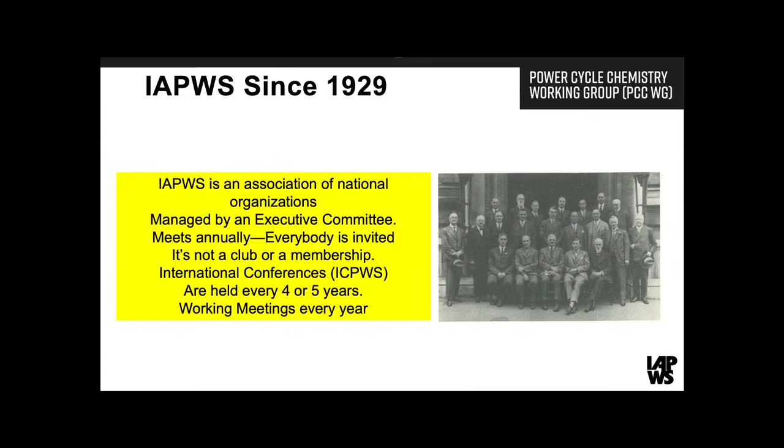Barry will be talking about those as well later on. IAPWS has been around since 1929. It's an association of national organisations. I wear a couple of hats in IAPWS - I'm also chair of the New Zealand branch, and it's managed by an executive committee that meets annually. The next meeting is coming up in Helsinki in June, and everyone's invited. We try and hold a conference every 4 or 5 years, and every year we have a working meeting that everyone's welcome to come to.

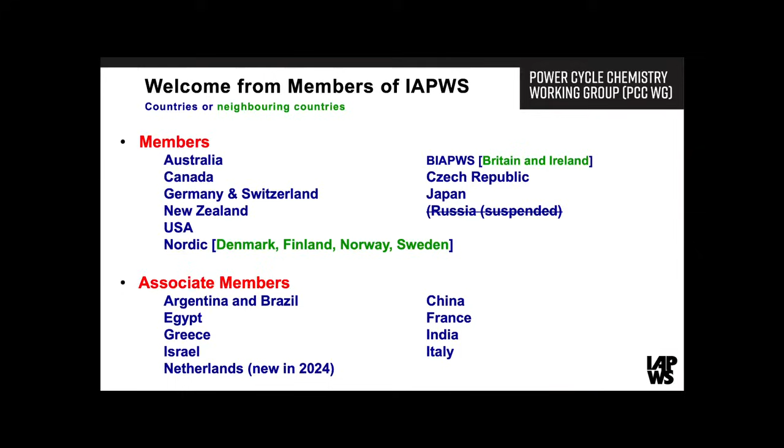Our official members at the moment are Australia, Canada, Germany and Switzerland, New Zealand, the USA, our Nordic friends - a combination of Denmark, Finland, Norway, Sweden - IAPWS Britain and Ireland, Czech Republic, Japan, and Russia is currently suspended. Then we have a second tier, associate members, which are countries forming their national committees and coming into IAPWS. There's a few of those you can see.

IAPWS is made up of multiple working groups. We have an executive committee, and we have the thermophysical properties of water and steam, TPWS - that's where steam tables come from, so anyone from a power station background will know about those.

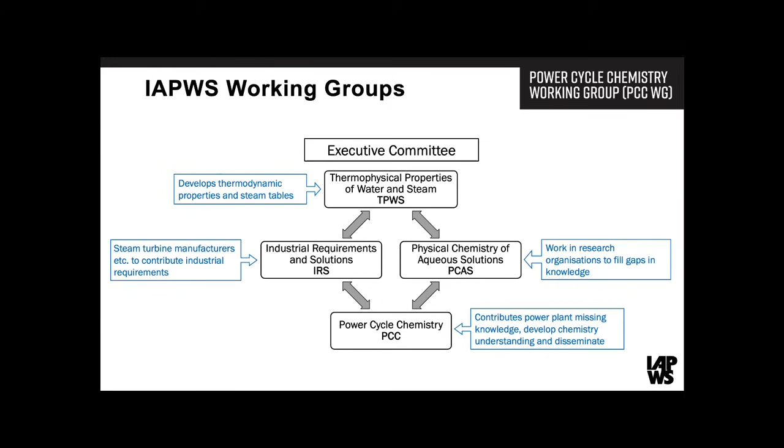We have industrial requirements and solutions, which a lot of the steam turbine manufacturers are involved in. The physical chemistry of aqueous solutions group, PCAS, involves the universities and research people. And down the bottom is little old power cycle chemistry - we're the practical cousins of IAPWS. We are the power plant, water, steam, industrial people, so we work in that area.

Barry will be talking about these, but if you go to the IAPWS website and click through onto tech guides, you'll find all of the technical guidance documents - guidelines for power plants, industrial plants, everything to do with water and steam - and these are all free to download as PDFs and use to your heart's content.

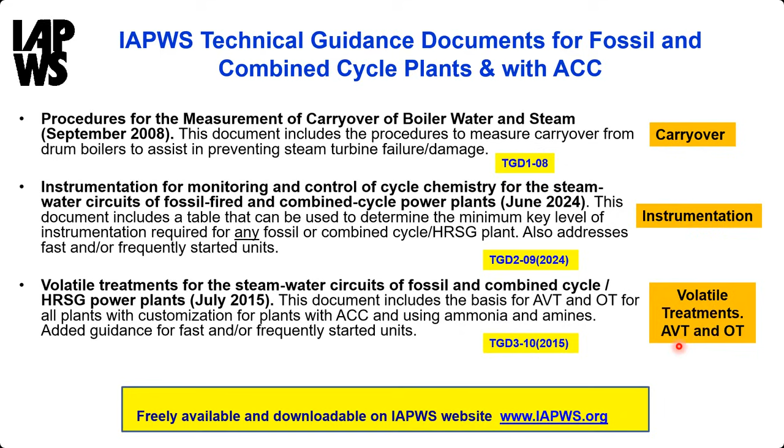And next, this one here is the other treatment document, on phosphate and sodium hydroxide. We call this PT and CT.

This is the major document on steam purity. It tells you everything about the guidance for steam, and introduces you to some of the failure mechanisms, which I'll talk about towards the end of this presentation.

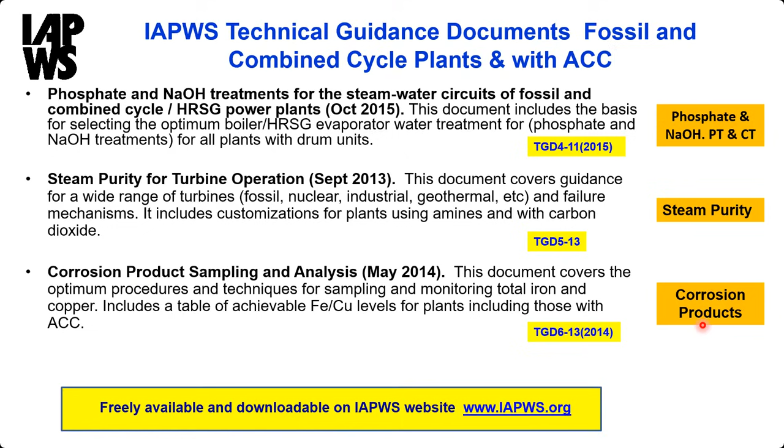Corrosion products is very important, as you'll see, probably the most important. This tells you how to measure them, sample them, and analyze them properly. This next one is the other important document for HRSGs and HP evaporators, to identify the deposits, how to sample for the deposits, and what that result then means for moving ahead with the HRSG.

There are two guidance documents on film forming substances. This is the first one, for fossil and combined cycle plants. The other one is for industrial plants.

This document at the bottom is for air in-leakage. And this is the industrial plants film forming substances document. Then the final one is on the management of generator water cooling.

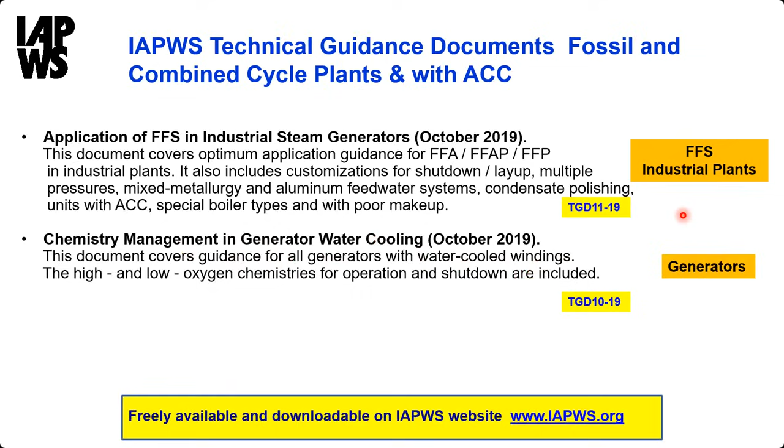Those are the major documents I wanted to introduce at the beginning, and you'll see as we go through indications like these, showing how the IAPWS documents cover the major failure and damage mechanisms that are influenced by the chemistry.

Having done that introduction, let's move ahead to why and how these technical guidance documents have been introduced. There are basically two factors that have driven their introduction and development for fossil and combined cycle plants. The first item is to delineate the major damage and failure mechanisms that are influenced by the cycle chemistry. So what are they?

The second item we need to take into account is the statistics on deficient and non-optimum cycle chemistry processes. We call these repeat cycle chemistry situations, RCCS, and you're going to hear quite a lot about those as we go through the next half hour.

So first, let's look at the major cycle chemistry damage mechanisms in these plants. First of all, of course, are tube failures. Tube failures are probably the most important, and there are two we're really interested in. One is flow accelerated corrosion, which is the leading tube failure mechanism in HRSGs and a major safety issue in fossil plants.

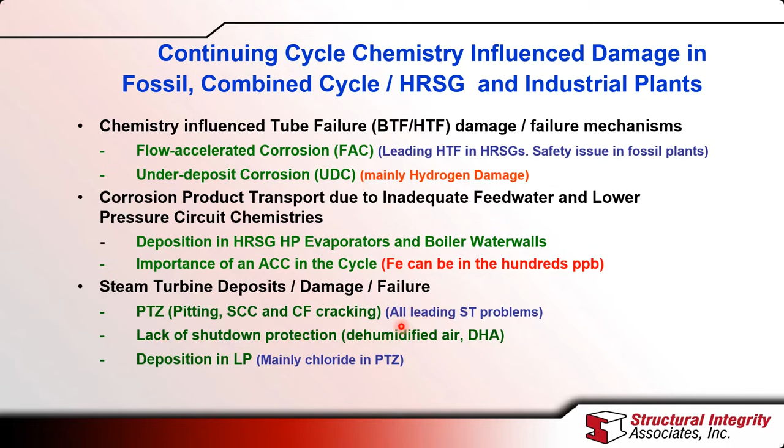So what are the main indicators of damage and failure? I've already indicated that we call these repeat cycle chemistry situations, and from the data that we have, which you'll see in a couple of slides, this confirms that the failure and damage we just talked about are not random, but are controlled by plants operating with multiples—two or more—of RCCS, and they relate to nine items. I'm not going to go through these now because we'll cover them in detail, but basically you can look upon them as deficiencies in cycle chemistry control of plants.

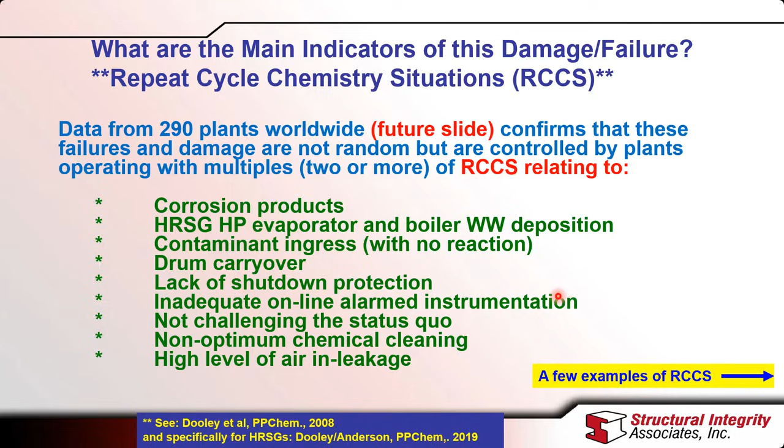To give you an indication of what they are, I've included a couple of examples here, not for all of them, just for three. For corrosion products, we most often find these two at the top: the corrosion products are not known in plants, and very often they're too high and above local guidance values. These are the two main ones for corrosion products, but there are others here that you can read.

HRSG HP evaporator deposits—these are very important because these are the items that control those failure mechanisms under deposit corrosion. HP evaporator samples are not being taken, which means there's no knowledge of deposit levels or the deposition rate. Sometimes the deposits are very high, as I'll show you a little later, and very often not linked with the chemistry or the FAC in other parts of the cycle.

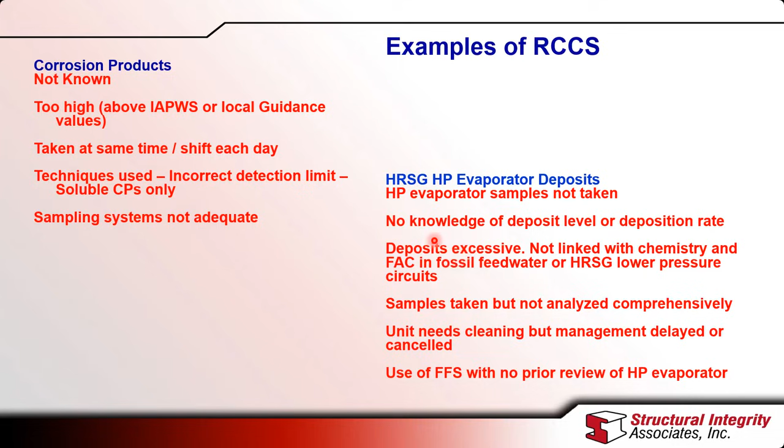The third one I want to introduce is what we call challenging the status quo, the most frequent being plants continuing to operate with the chemistry that's been there since commissioning. This means using incorrect or outdated guidelines, and continuing to use certain chemistry treatments—phosphate treatment, most often still using congruent phosphate treatment instead of phosphate treatment with only trisodium phosphate. Continuing to use reducing agents in combined cycle plants is very common, which results in FAC, and is very frequent in all-ferrous fossil plants as well. This leads to misunderstanding between two major chemistries: the oxidizing chemistry AVT(O) and the reducing chemistry AVT(R).

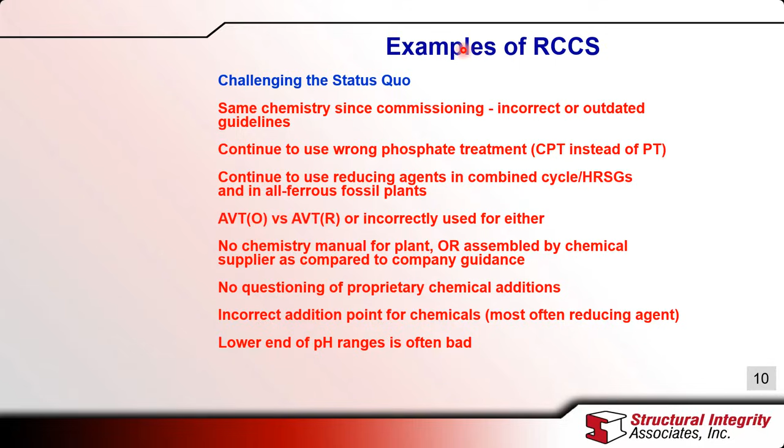Hopefully this gives you some idea of what these RCCS are. The next thing I wanted to cover was looking at the international statistics for these.

I just updated this table, which I'm going to show you next, in March for the Australian IAPWS symposium in Queensland that I attended. Here's the table, and you can see these are the categories we just introduced, the repeat cycle chemistry situation categories. This is the data for fossil plants, and this is the data for combined cycle HRSG plants. The numbers on the table represent the percentage of total plants that have these items as RCCS.

So you can see that this provides a ranking. The most important one being all the aspects involved in corrosion products, not measuring them, operating with them too high. Online instrumentation, not having the required instrumentation. Drum carryover, measuring the carryover of impurities into steam. And the fourth one, not challenging the status quo in some of the areas I talked about, usually using the wrong chemistry or using the wrong chemistry for too long.

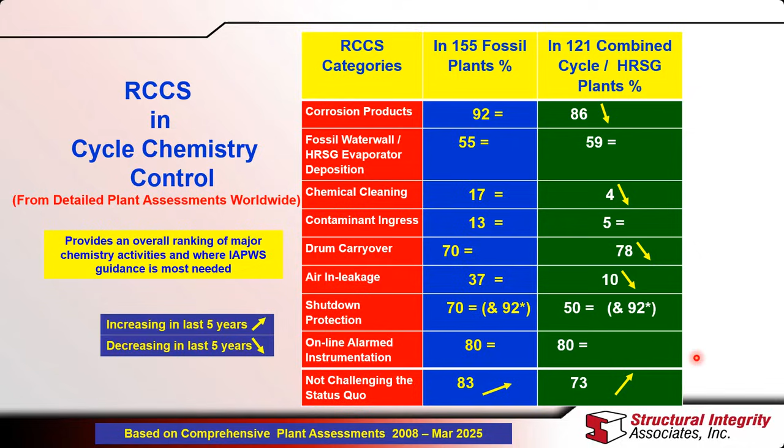Let me see if I can get the next slide here. So let's now look at the other aspect. I want to illustrate the importance of RCCS as compared to operating with the optimum chemistry. What's the difference between a plant operating with all the features already included in the guidance documents and a plant that has multiple RCCS?

We need to look at some examples of cycle chemistry influence, damage, and failure, and how the IAPWS TGD, which I introduced, address all aspects and should be incorporated into the design by the manufacturers originally. We're trying to work on that aspect. We have been for some time, and operation with the plants, and that's up to people like yourself using these guidance documents. So to illustrate this, what I've done is...

I've just selected four damage and failure mechanisms here, and I'm going to go through each one, tell you which parts of RCCS contribute to these and which of the IAPWS documents directly address these problems.

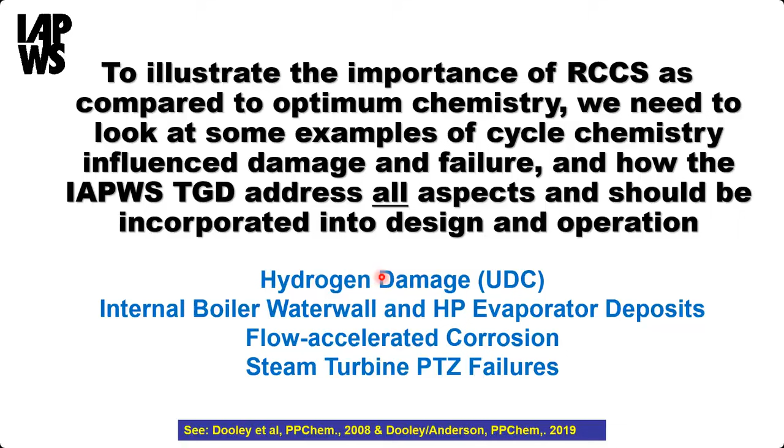So the first one, we'll look at under deposit corrosion and hydrogen damage. Here are a couple of examples: under deposit corrosion, hydrogen damage in HRSG, HP evaporators. You can see the inside surface looks a little dirty, very heavy deposits. If you cross-section it, you can see those heavy deposits and the corrosion that takes place right here. And down here is where we've conducted a metallurgical examination. You can see the very heavy corrosion products.

When we look at these in detail, you can see it most often looks like this in a laminated structure. This laminated structure indicates that the rate is very fast. It's a linear corrosion rate, and that's why these are so important. Eventually, we get a brittle failure, as you can see right here.

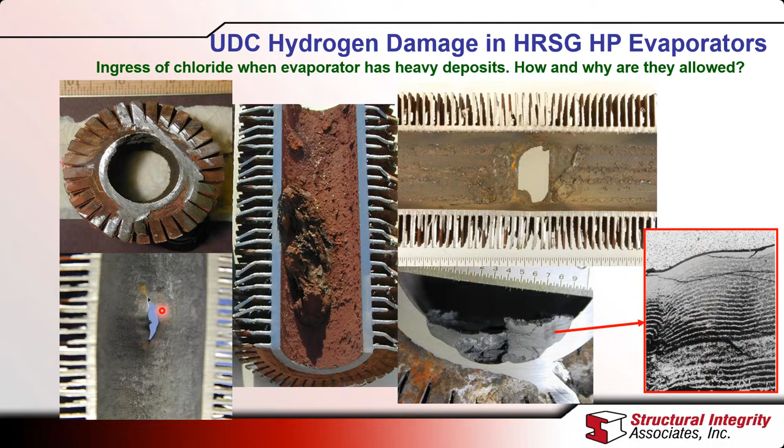And if we look at the same mechanism in fossil plants, you can see again the examples of the brittle failure that takes place, initiated by heavy deposits on the internal surface. Here's the heavy deposit on those internal surfaces.

When we look in detail with analytical microscopy, we find that along this interface here, we usually have a chloride, and this chloride is there because it's concentrated at the bottom of a heavy deposit. It won't concentrate at the bottom if the deposit is only thin. So this is a key part of the hydrogen damage under deposit mechanism.

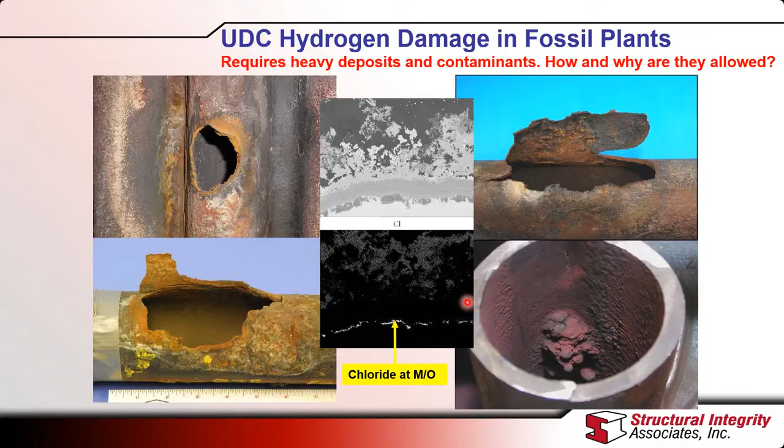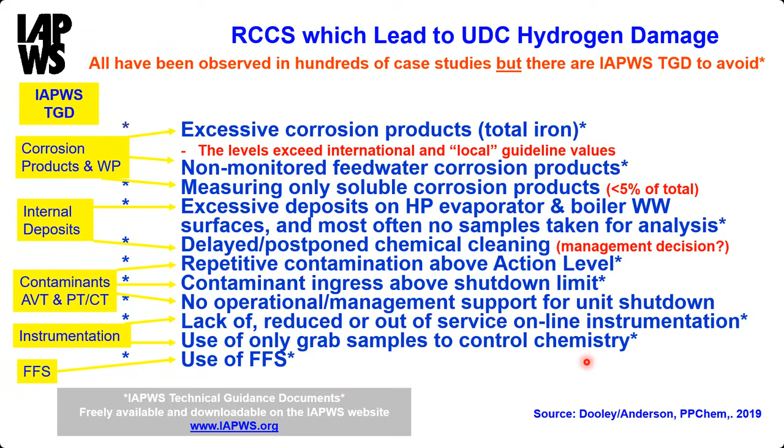So let's have a quick look at some of the details of the corrosion product ones, because they're the important ones. Here we have, technically, something old and something new. The old is the original IAPWS document on corrosion products given down here, and this includes all the information you need on sampling and locations of where to take those corrosion product samples, how to do the analysis, and most importantly, that you need full digestion to make sure that all the particles are solubilized so we can do the analysis properly.

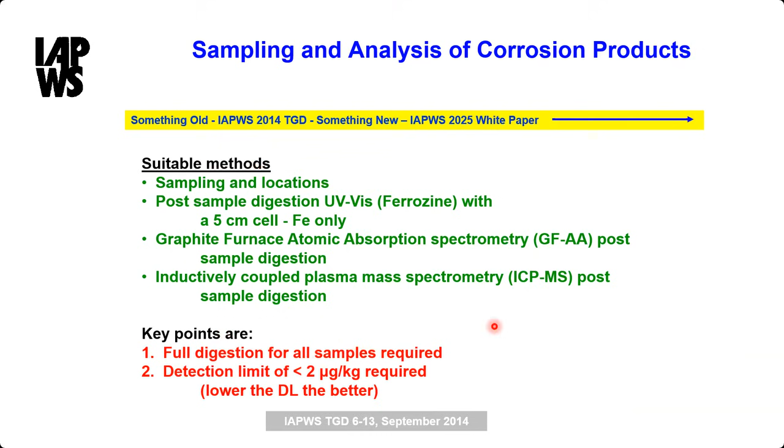And the next slide shows the famous achievable levels - this is the achievable iron and copper levels for different types of plants. This, I emphasize, is for steady state base loaded plants. So for instance, if you have a fossil or combined cycle plant operating on AVT, you would like the total iron levels to be less than 2 ppb. If you operated on an oxidizing treatment such as OT, then you would want the iron levels to be a little lower than that. Here's the same value for drums on HRSGs.

Here's the values for units with air-cooled condenser at the air-cooled condenser outlet in the condensate system, less than 10. And if you use a post-condensate filter, we like a 5 micron filter, then you would be hoping to achieve less than 5 micrograms, 5 ppb.

So this gives you an indication that if you have higher values than these, then when we go to plants, we would rate that as an RCCS. You can rate it yourself as an RCCS and address it.

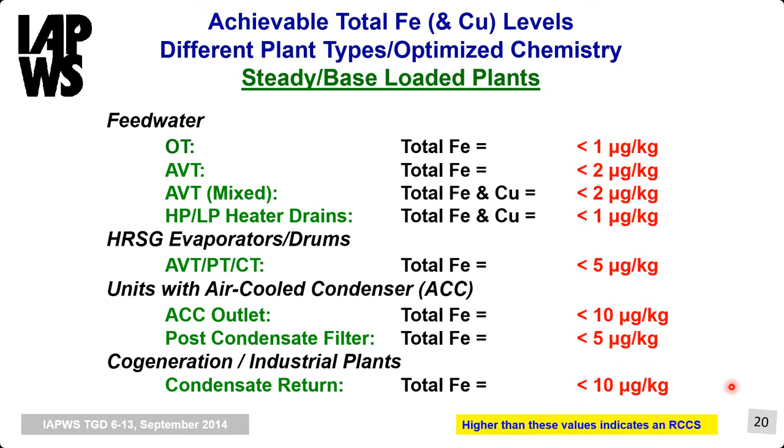So now what I wanted to go into is an almost brand new IAPWS white paper, which we just published. This is for fast start or frequently started plants, in comparison to the steady plants that we've just talked about. Here, the important corrosion product indicator is how quickly the iron decay takes place from the high shutdown level during startup. This can be monitored using proxy techniques such as turbidity.

You can see here's an example of it from some of the work we did in developing this. You can see here's the decay profile, as we call it, and these vertical lines indicate what's happening on the unit - gas turbine fires, makeup additions, synchronization - and this is the calibration curve.

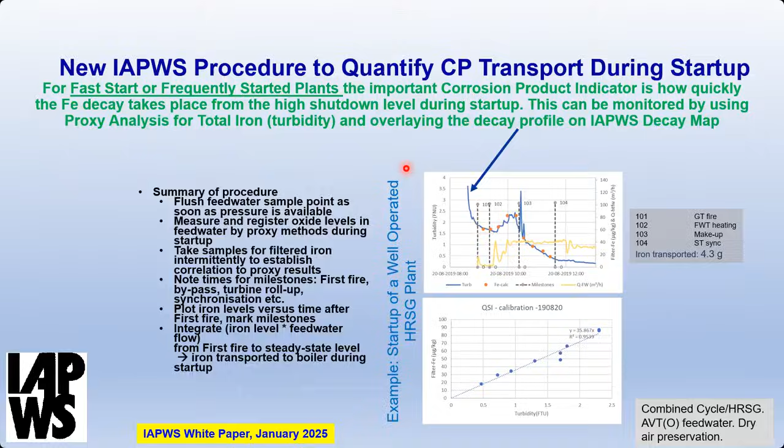So once we had this, we then needed to have a tool to be able to make an assessment of whether this profile is good or bad. And this is one of the most exciting things that I've been involved in for many years. This is a really excellent tool, I think.

Here is what we call the IAPWS corrosion product decay map, and you can see that it has basically three colors. If that decay profile is in the green, it essentially translates to a particular unit having the optimum operational chemistry and shutdown chemistry. If it's in the red, completely opposite - poor operational and poor shutdown chemistry. At the bottom here, we've just put the levels from that achievable table that I just showed you.

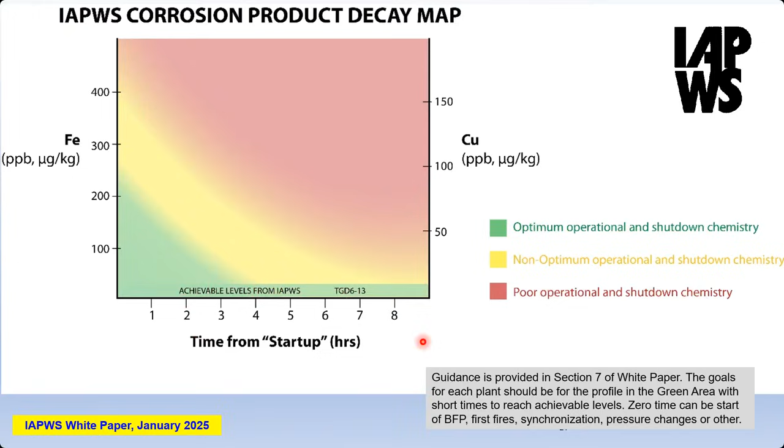So here's the first example. This is that profile that I just showed you that we developed, and it's been superimposed on the decay map. You can see that it's basically in the green area, suggesting that it's optimum operational and shutdown chemistry.

It comes almost down to the achievable level in a couple of hours, which is good. This is for a well-operated combined cycle plant operating on AVTO, but using dry air preservation of the boiler - so good shutdown protection as well.

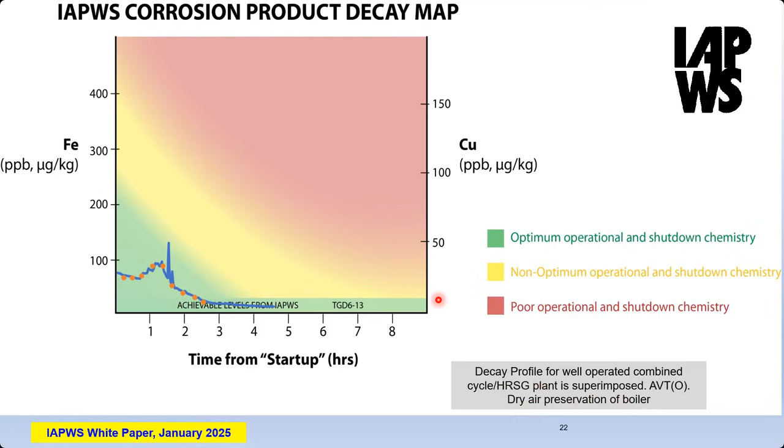So contrast that with these two examples. These are examples from plants that need to improve the operation and/or the shutdown chemistry. In this case, this is again an all-ferrous unit operating on AVTO, daily load cycling, and starting up in 60 megawatt increments.

And now you can see that this decay profile is into the red with very high levels. So the total amount of corrosion products, iron, that's transported will be very high. And you can see that those high levels essentially last for 4 or 5 hours.

This is another example, another all-ferrous system operating on AVTO, as it has summer shutdowns with no protection. In this case, the profile doesn't actually go into the red, but you can see it remains high for quite a long period of time and does not come back down to the achievable levels until 6 or 7 hours. So a large amount of iron being transported into the unit.

So from the point of view of RCCS, if the decay profile is in the red or the yellow, then we indicate that that's an RCCS, and you can do the same. You can do these proxy tests very easily and superimpose them on the IAPWS map and see if you have RCCS.

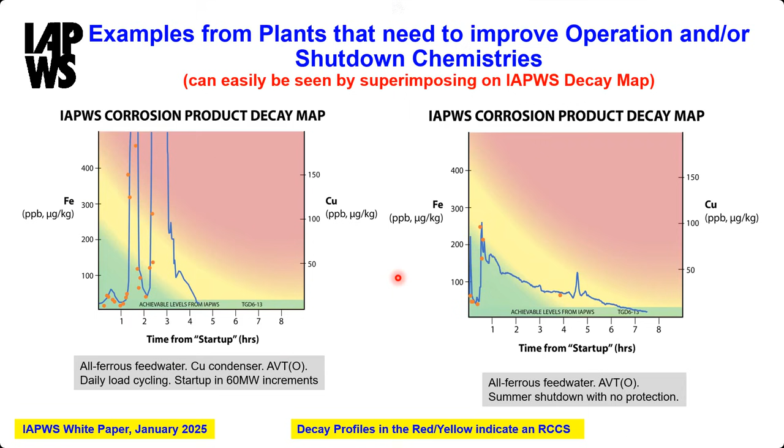So the new white paper also includes something I think that's very useful: possible uses for the decay map. The first one, obviously, should be clear. It provides some fine tuning of the cycle chemistry and shutdown procedures of a unit, to minimize the iron with the decay profile moving to the green.

The way that I look at these is not the absolute values of the iron levels, but how quickly you can move that decay profile into the green area in the lower left part of the diagram.

The white paper in section 10 provides you an indication of what optimum chemistries are, and of course non-optimum chemistries, and it includes that for all the different types of units: supercritical, drum units, combined cycle. This is very, very powerful, for all the units that exist in the world. You can go to this section 10 and see what's good and bad.

You can also use it for units with an ACC. If you've been operating with a low pH and you've got very high levels of iron, then you could increase the level of pH and watch the iron level come down. Again, you want it to move towards the green, towards the lower left.

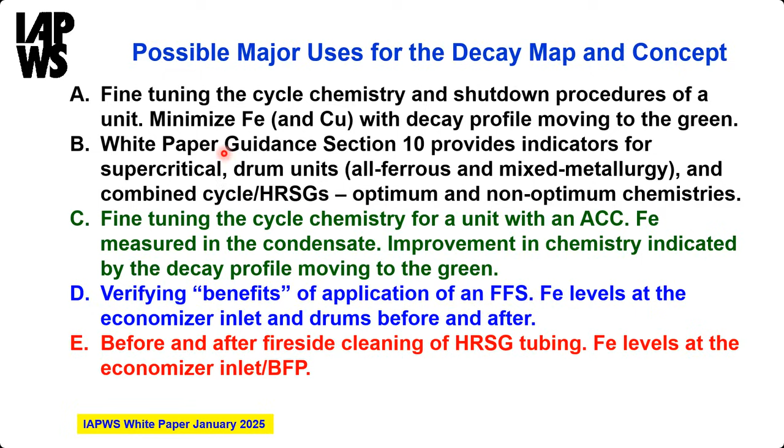So now I want to move on to the second area that we selected, and this is for deposits on boiler water walls and HRSG HP evaporators. These are important because they are precursors to under deposit corrosion mechanisms.

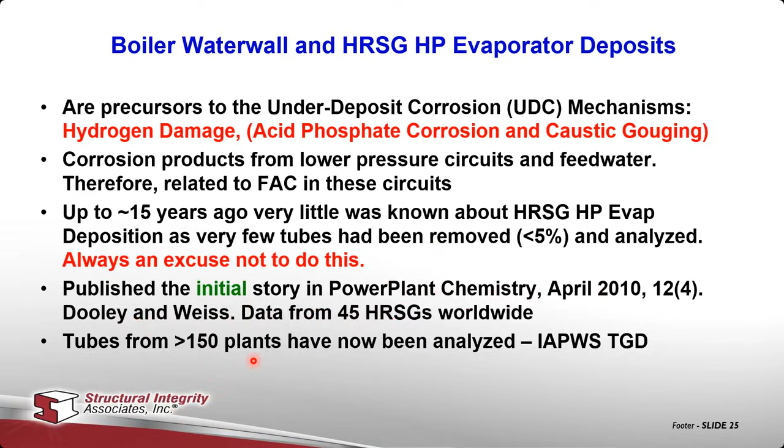Up to about 15 years ago, there was very little known about HRSG HP evaporator deposition, as very few tubes had been removed. We published the first study. My colleague and I at Structural looked at 45 samples and developed what I'll show you in a minute, the deposit map. Now we've continued, and others are doing the same, and we have more than 150 plants in the database. The actual format of it has not changed at all.

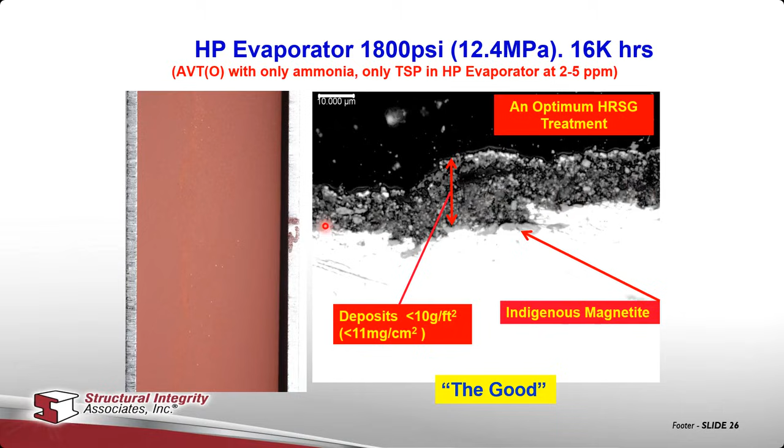Let's have a look at some examples of optimum HRSG chemistry. You take a tube out, and it looks nice and red and smooth like this. When we take a cross section, the white area is the tube, and these are the deposits. You can see pretty low levels here, and the deposits themselves are particulate, and most importantly, there's no concentration at the base of the deposit. So this is very good.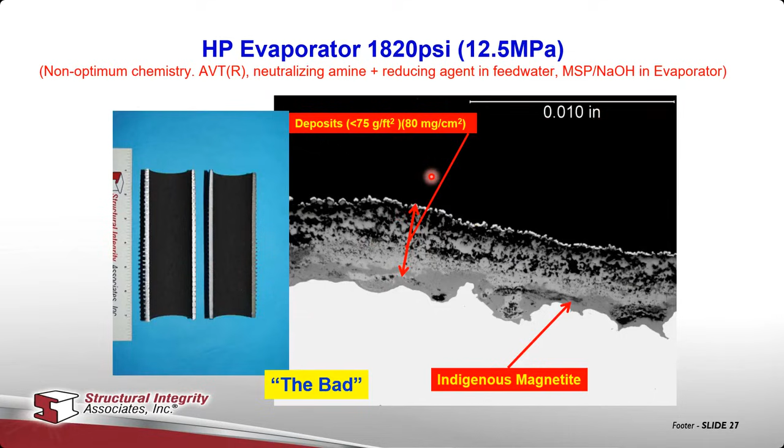Contrast this with an HP evaporator with non-optimum chemistry using AVT-R. When we take the sample out, they're usually black on the inside, and the deposits are very thick, much thicker than what we've just seen. If we do a little more analysis, we can see that in these heavily deposited areas - this is the deposit, this is the tube - you can see these dark areas along the base of the deposit right here. We call these reaction products.

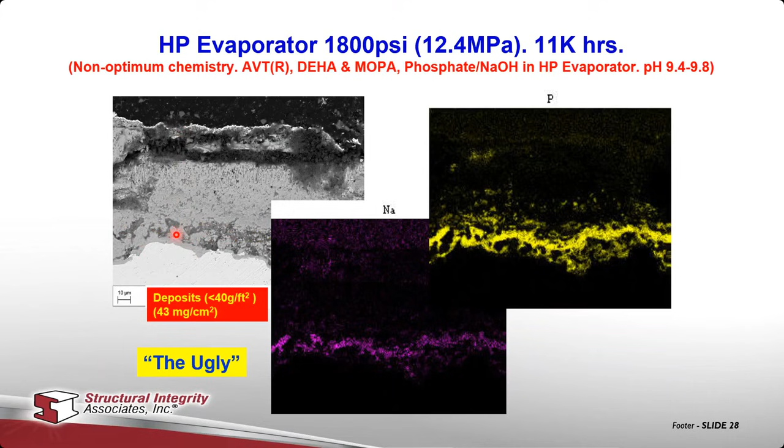You can see them highlighted with sodium phosphate right here. We don't want to see these, because this means you can have concentration of chloride as well and end up with under deposit corrosion. So this is an important aspect of preventing under deposit corrosion: to identify not only the deposits and their levels, which a lot of organizations do, but also identify these corrosion reaction products, which are these dark areas right here.

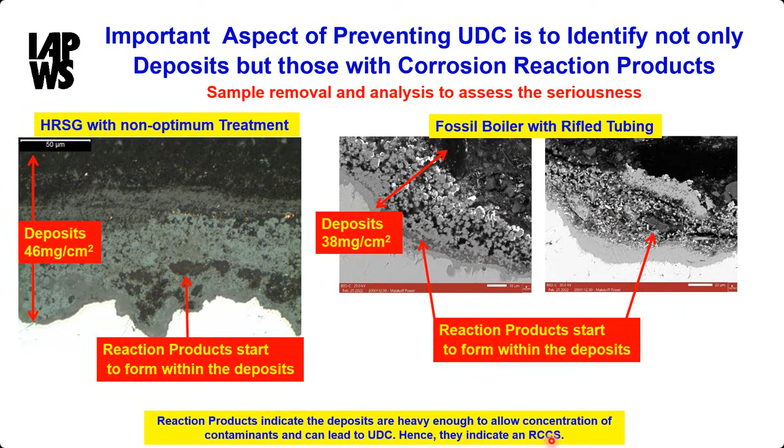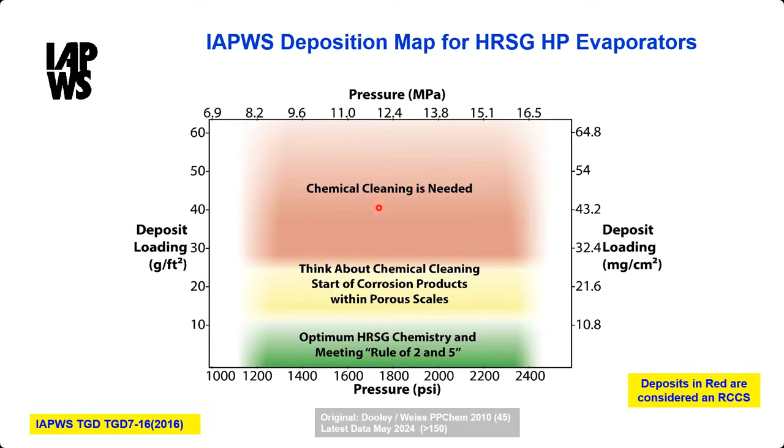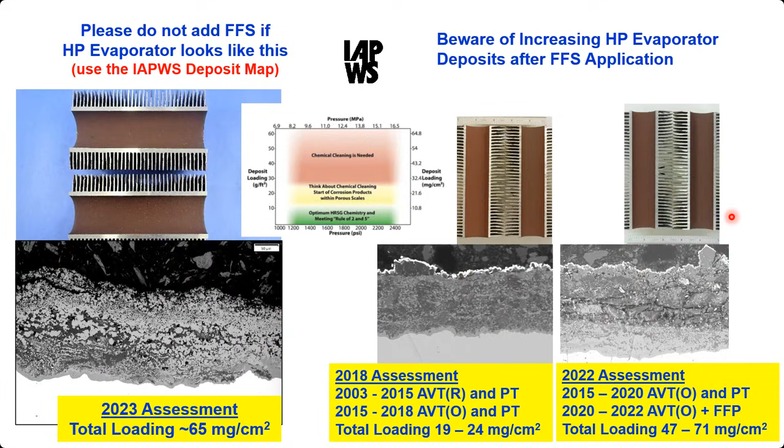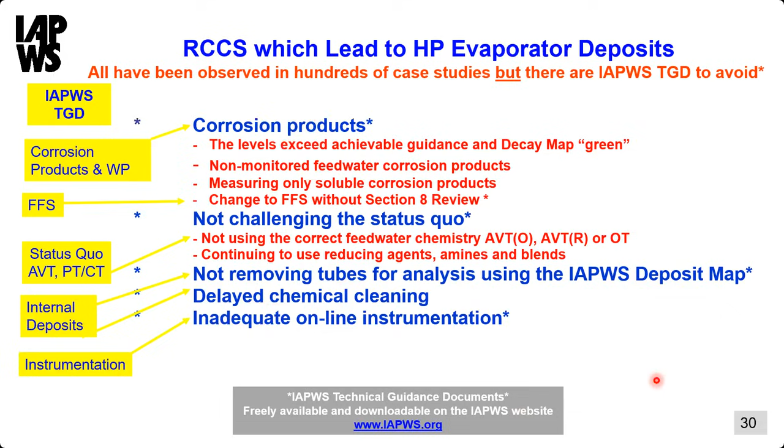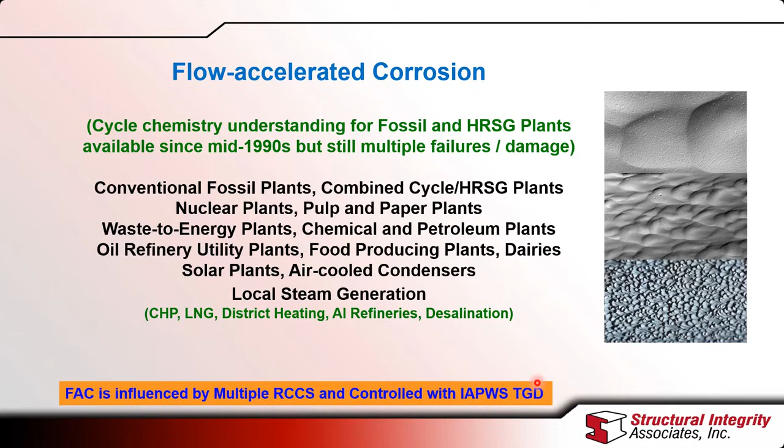So let's just have a look here. We have very extensive records in terms of where FAC exists. And if any of you want to go further, at the bottom of all these slides there are references. Scott has a special page where he can reference these. They're available freely to you on a website somewhere, and he'll provide that to you.

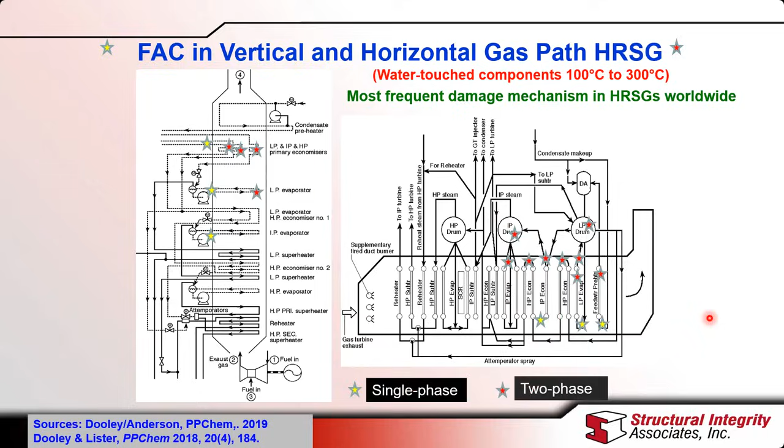But we have this excellent understanding of where FAC takes place in a single-phase version and a two-phase version for HRSGs, and similarly for fossil plants. So again, the single-phase FAC items are right here, and the two-phase ones are generally in the drain lines and the cascading drain lines right here. If you want to know any details about it, please go to this reference where it's very extensively covered.

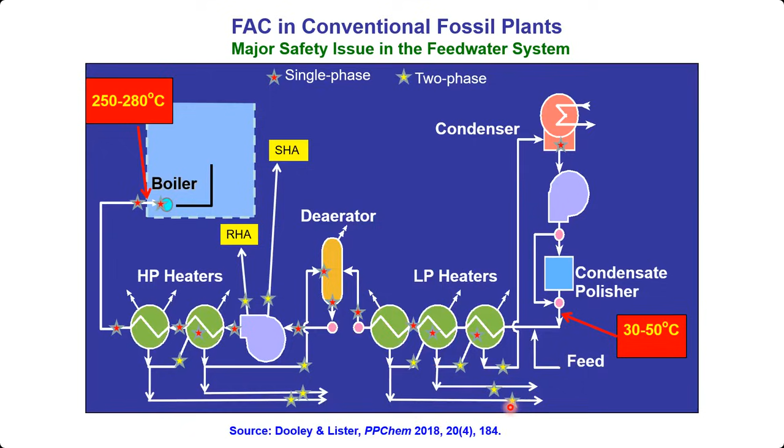So I wanted to indicate that the situation with FAC is still occurring, and not a very good situation, possibly at the same rate as it has for the last 10 or 15 years. All the examples of FAC are numerous and published. There are basically no new locations or situations over the last 15 years.

But the real item from a chemistry point of view is that single and two-phase FAC are still occurring and not being identified uniquely. This is one of the most important things in FAC control, because these two types of FAC are controlled differently from a chemistry point of view. Again, the published documents indicate this in great detail. So let me show you a couple of examples of what to look for.

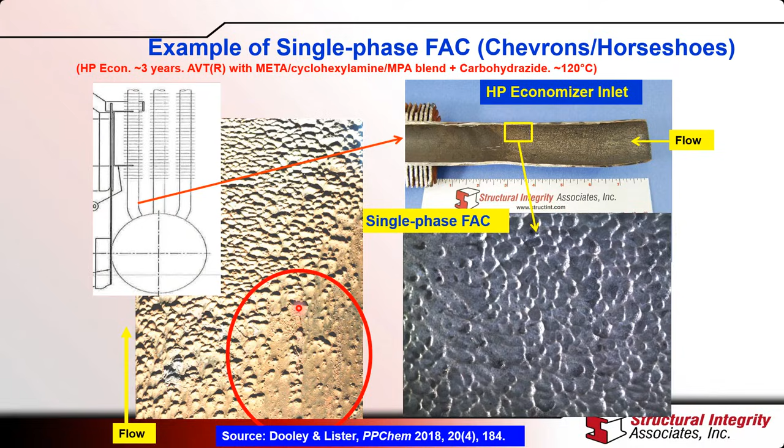This is an example of single-phase FAC, and many of you will have heard of the orange peel appearance, which looks like this. But the real thing that indicates whether it's single-phase FAC is where the FAC is not quite as severe. You see this line of chevrons or horseshoes. We say the horse is walking in the direction of flow, and this is the key indicator for single-phase FAC.

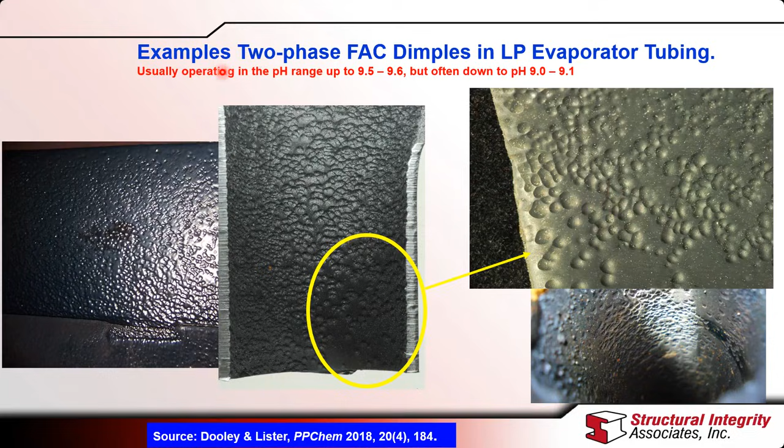But this is very often misidentified as single phase FAC, and the plant is trying to solve the problem by adding oxygen. I have to tell them that they can add as much oxygen as they want, they will not turn off this FAC. So it's very important that you identify whether it's single phase or two phase FAC.

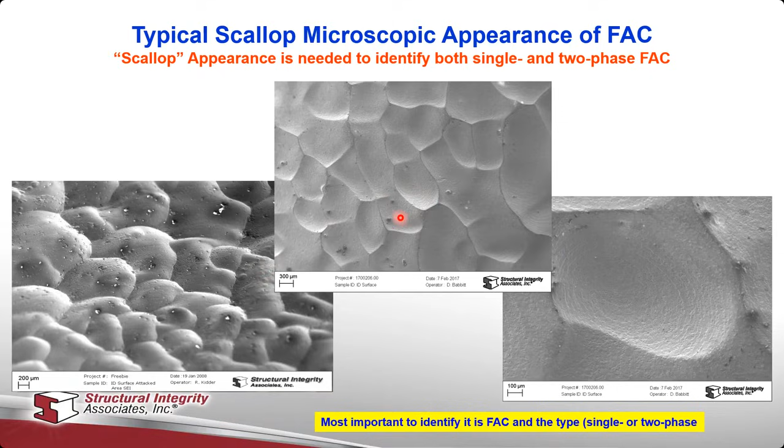And then if you take the metallography a little bit further and look at it in a scanning microscope, we generally see this sort of appearance. These are called the scallops of FAC at a microscopic level. So it's most important to identify that the failure mechanism you're dealing with is FAC, and the type is either single phase or two phase. You see this appearance in both single and two phase FAC, but you use the morphology I've just shown you to identify which one.

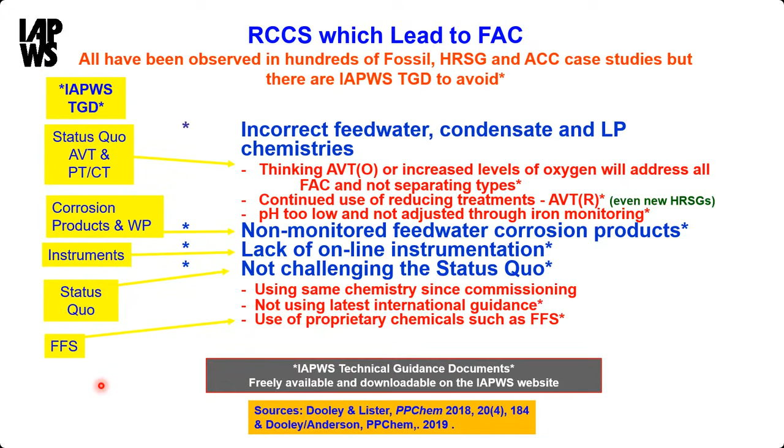Not monitoring the feed water corrosion products to see if you have FAC. I've already covered that, it's covered by the corrosion product TGD and the new white paper that you can do that. And instrumentation, whether you have the right instrumentation, status quo, using the same chemistry since commissioning, basically the same things I mentioned already. You'll notice that for each one of these RCCS items that lead to FAC, there's an IAPWS technical guidance document to address it. So let me move on here.

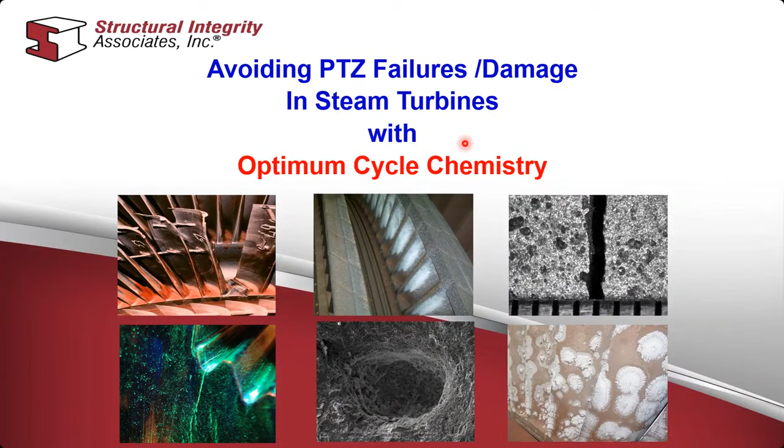The final one that I want to just cover in the final 5 minutes is avoiding phase transition zone failures and damage. That's in the phase transition zone of the steam turbine. Here's a couple of examples.

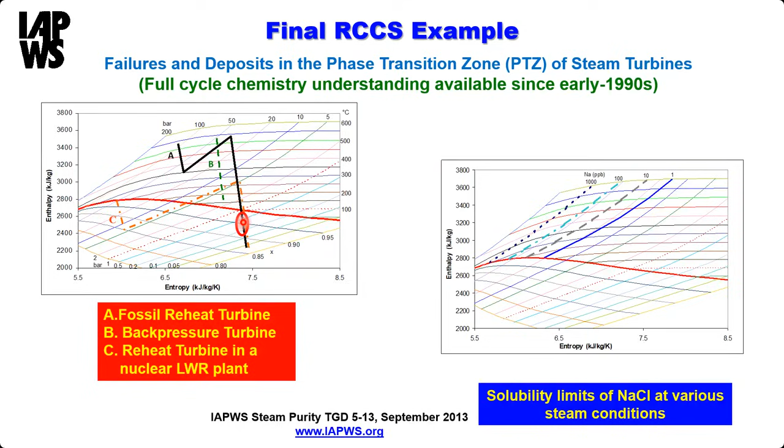Just so you know where the phase transition zone is, this is what we call the Mollier diagram, and this is the steam expansion through the turbine. This last part is through the LP, and the red is the saturation line. This is the phase transition zone here, where the phase transition takes place, and so this is the important area in the low pressure turbine. These are just some examples.

The important thing to note is that the chemistry activity in a steam turbine, all phase transition zone failures initiate at pits. You can see many examples here - this is a pit, initiating at a pit. The next slide shows the same, a little bit more detail, but at the metallographic level you can see the pit, stress corrosion cracking, initiating at a pit, at a pit, at a pit, and at a pit here. So this is one of the common features that we see.

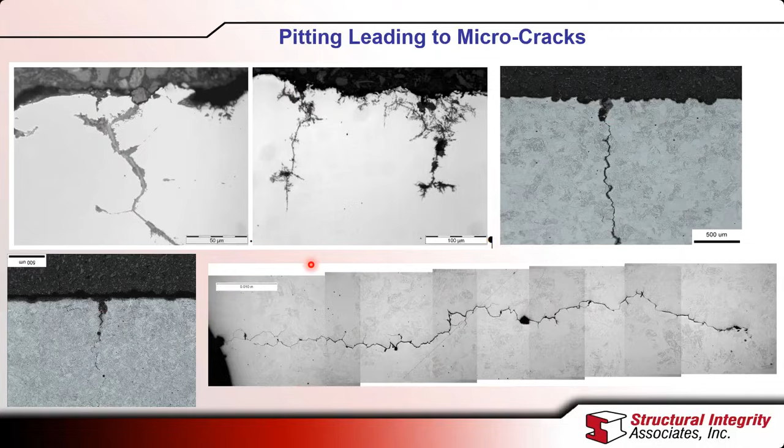To understand this, you have this number of things - a very complicated mechanism - but we've identified it with some help from IAPWS and some other work that was done, some of it supported by EPRI when I was at EPRI, by Palmer and Simonson.

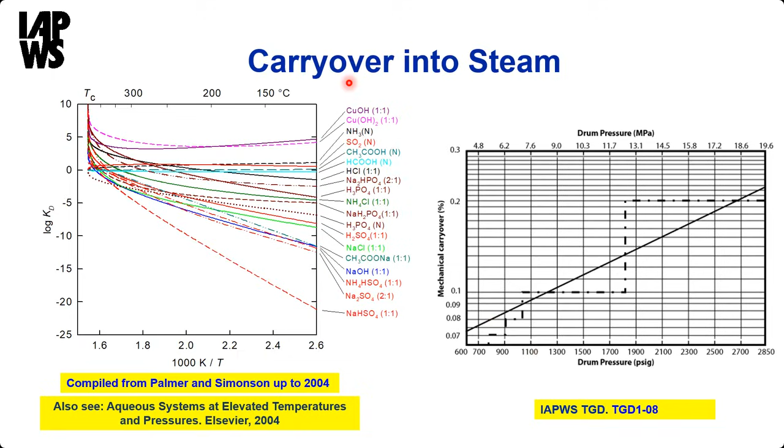For the mechanical carryover, this is the carryover document. You can see that when you measure the carryover at any of the pressures, you want the mechanical carryover percent to be less than this solid line here. So this is for mechanical carryover. If you operate a high pressure unit above 2300 psi or 16 megapascals, there is a very small effect of the volatile carryover. But at 2800 psi, the volatile only represents a very small amount, much less than 0.1%. So, but we find many plants do not measure carryover, and that's a really important item.

There's also some items you need to think about in terms of these mechanisms - they won't take place unless there's any moisture. So we spent a lot of time many years ago identifying what the moisture, early condensate, and the liquid films on the blade surfaces look like. When you look at the moisture formation, that's the condensate that forms - we have concentration ratios up to about 100 times. Concentration increases with decreasing moisture; the closer you get to the actual saturation line, the concentration will be higher. The droplets are typically 0.1 microns in size, and their formation is influenced by surface tension. There's essentially no oxygen in that liquid, even though you might be operating a unit on oxygenated treatment.

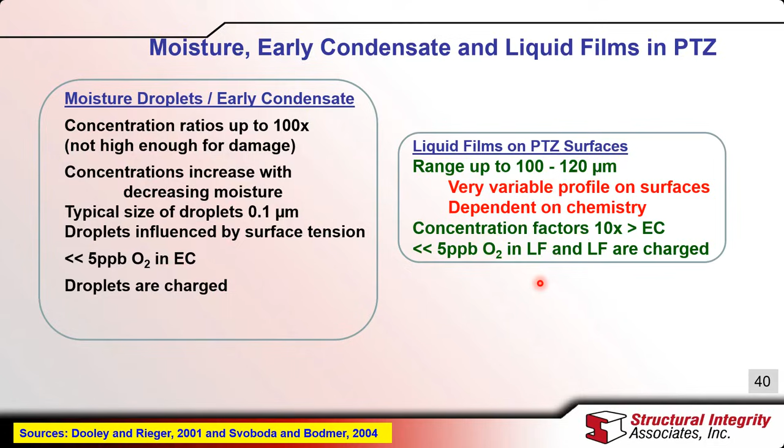And for the liquid films that grow on the surfaces, they range up to this sort of level. They're very variable - concentration factors can be another 10 times, and again there's no oxygen associated with those liquids. I produced this little diagram many years ago just to illustrate this. You can see that this is the phase transition zone - these are the L-0 or L-1 blades. This is the droplet formation here and the film formation on the blade surfaces. And then this environment here goes to the condenser, or acts as the air-cooled condenser initiating environment.

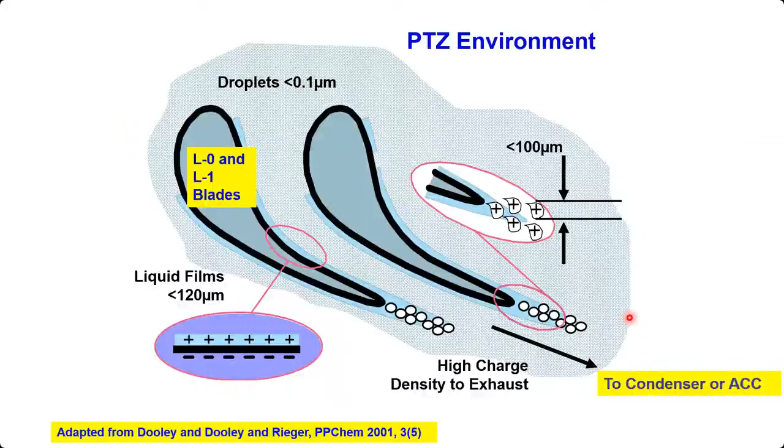It's also recognized that salt crystals deposit onto the blade surfaces on units even with the best steam purity. And this is the reason we have to provide protection, if possible, with dehumidified air to stop these crystals changing into, or transforming into, a pit.

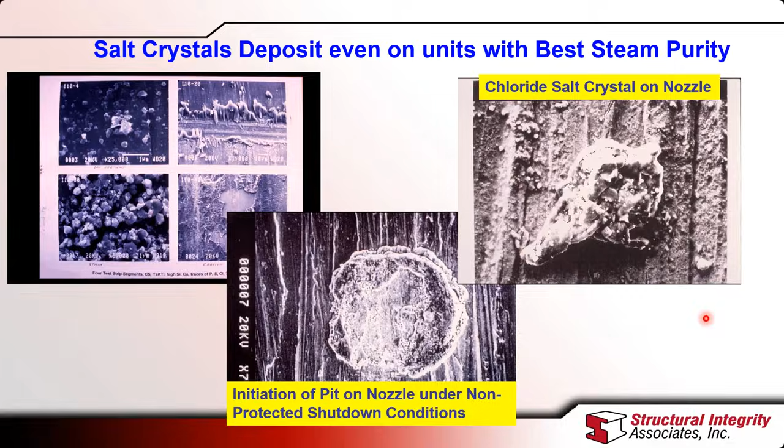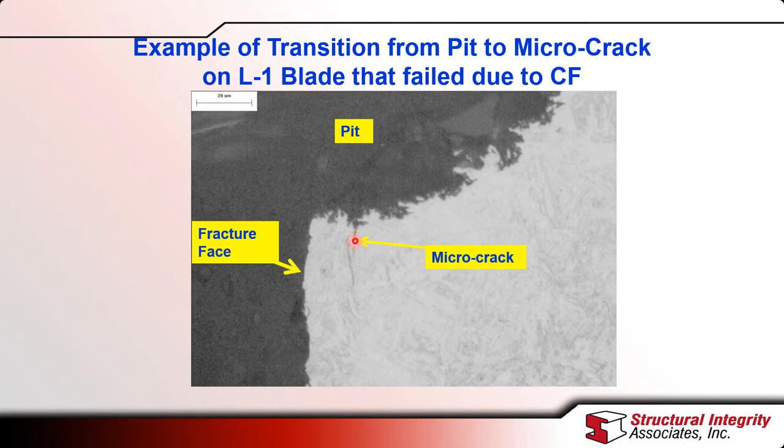So this is just an example. This is the internal surface of a pit here that's already formed, and when the liquid film forms and the stress is involved, you can get a microcrack forming like this. And this is the actual failure of the blade, right here.

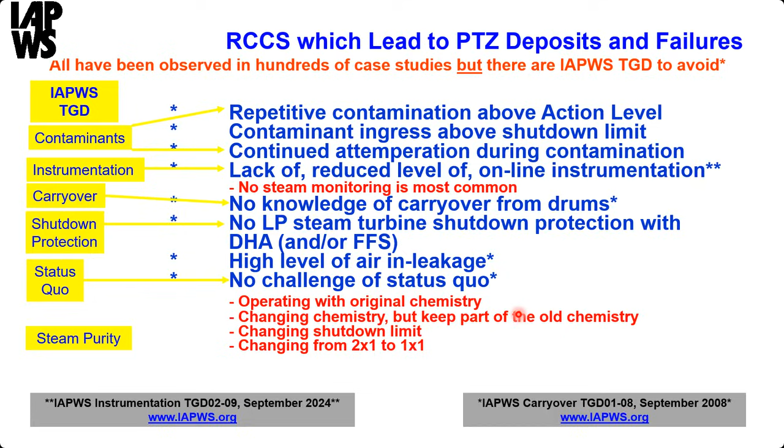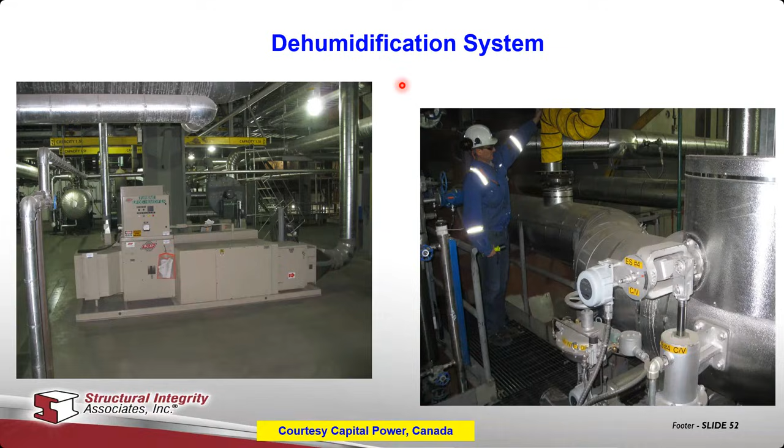So the last slide, I think, is right here. These are a few closing remarks I have. I think I've indicated that RCCS relate to the very basics of power plant chemistry and thus to plant reliability and performance. We find that individual RCCS are generally not a problem. If you only have one, it should be addressed, but it doesn't link synergistically with the other RCCS to result in damage. But more than 2 or 3 means the plant has or will have a problem in the near future.

We have a large database that indicates this. Each repeat situation for each of the damage failure mechanisms can be addressed by application of the IAPWS TGD and now the white paper. And as I showed you on that table, the most important RCCS are corrosion products. These represent 85 to 90% of organizations out there that have this RCCS. Deposits, instrumentation, and the status quo. And film forming substances, which we haven't had time to cover. I couldn't cover everything in the short time period, but these are covered by 2 IAPWS technical guidance documents.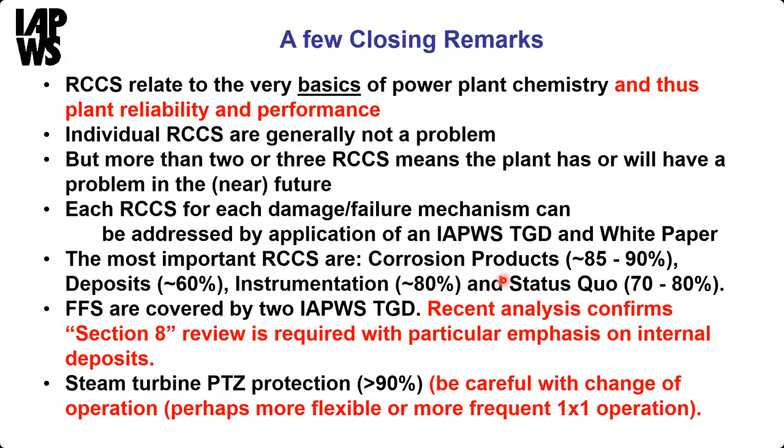So this is where I'm supposed to finish, and there's one more slide here, which I think Scott has already covered. I hope you've gained something out of this. Thanks for your attention, and I hope you have some questions and or comments. Scott is supposed to have been collecting them in the chat for us to deal with. So that's all I have to say.

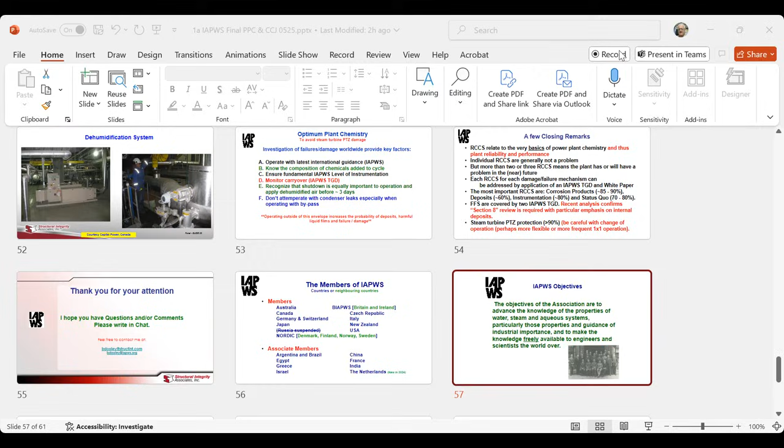So for everybody listening in, these types of discussions are part of IAPWS and our annual meetings. There's lots of conversations like this and good discussions that go on both officially in the meeting and on the edges of the meeting as well. It's all about sharing information and experience and knowledge to help people prevent repeat failures and having common problems over and over again. That's part of the goal of IAPWS.